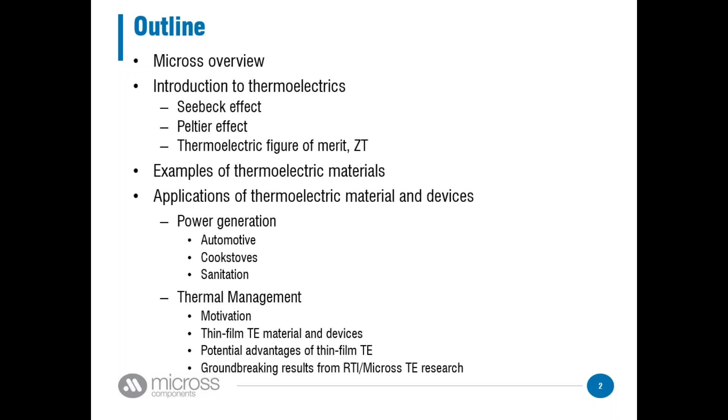First, as I said, I'll talk a little bit about Micross. Micross is a company based down in Orlando. They liked the work that we were doing at RTI, and they went ahead and bought our group out. Micross is basically a die manufacturer; it delivers any kind of die that the government needs. They work for the defense industry, space, medical, industrial. And what they want to do now is, they've never done research before, they're more of a manufacturer, but they want to get into research, and that's where RTI came in. That's what they liked about our group and the kind of thing that we did.

And they said, okay, we want to look at your through-silicon via stuff. We want to do your thermoelectric stuff. We want you to be a part of us. So that's what happened. As I said, our particular group at Micross is called Micross Advanced Interconnect Technology. That's where the AIT comes from.

We just recently got ISO 9001 certification. That was a big deal for us. We're also ITAR registered, which is also a big deal, because back at RTI we were very big into defense contracting. A lot of DARPA work. My career I've done mostly DARPA work, so that's very important for the kind of things that I do.

We do a little bit of a mix at Micross of more customer-based service work, and that is, here's a lot of wafers, we want solder bumps on a lot of them, versus the more researchy kind of thing, which is the side that I am. I do the more high-risk, high-reward, low TRL level type research. And in particular, the research I work on is thermoelectric materials and devices.

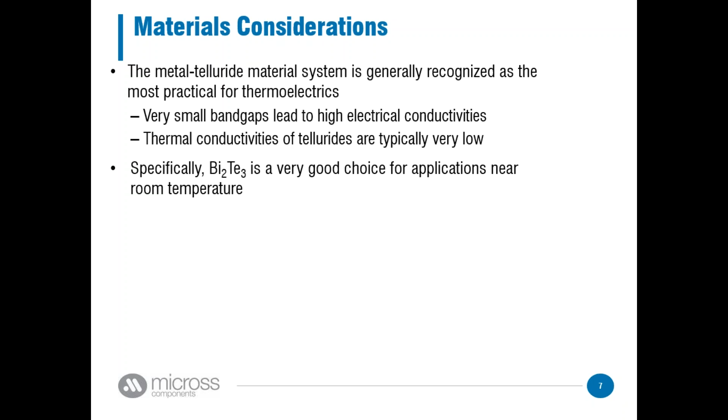So if you go and buy a thermoelectric module from Melcor, from Marlow, Custom Thermoelectric or something, it's going to be bismuth telluride, and it's going to be bulk, several millimeter thick elements of N and P type bismuth telluride. The performance you're going to get out of a commercial bismuth telluride module like that is a delta T, meaning the maximum temperature difference you will get from a single stage device, of around 70 Kelvin. And the amount of heat you're going to be able to pump is 10 watts per centimeter squared at a delta T of 0.

Don't get too concerned about this right now. I'm going to talk in a little bit more detail about what these numbers mean and why they're important, but I just want to introduce a frame of reference as we go forward into thermal management, the type of numbers that are available commercially.

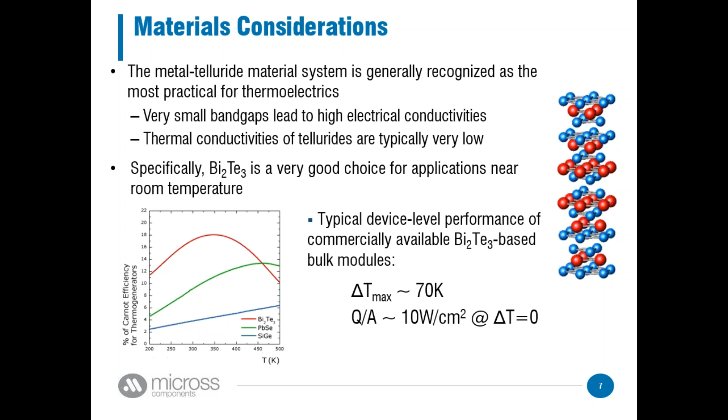Other common thermoelectric materials in addition to the tellurides are skutterudites. Skutterudites are basically a complex metal arsenide or metal antimonide structure, which has what's called a rattler atom. Essentially, it's a hollow structure that has some type of large, usually rare earth, atom inside of it. That rare earth atom is going to rattle, shake around in that lattice at a different frequency than the structure of the material itself. And that disharmony manages to scatter the thermal conductivity, which means you have the lower thermal conductivity you need to have a good thermoelectric effect.

Skutterudites are very popular with NASA. NASA uses these in their MMRTGs, the multi-mission radioisotope thermoelectric generator. Consider a radioisotope giving off a constant supply of heat. If you put this constant supply of heat with a thermoelectric material, it will convert that heat into electricity, and you have a constant source of electricity. And so it's very reliable. There's no moving parts. There's nothing that can really break per se. So NASA likes to take this type of radioisotope generator and put it in their satellites that go unmanned into space.

Clathrates are another type of material you may hear about when you read about thermoelectrics. It's essentially a cage type structure. And again, it uses the same sort of rattler atom that we talked about with the skutterudites. The two different resonant frequencies of the materials cause a drop in thermal conductivity, which again gives you the high ZT.

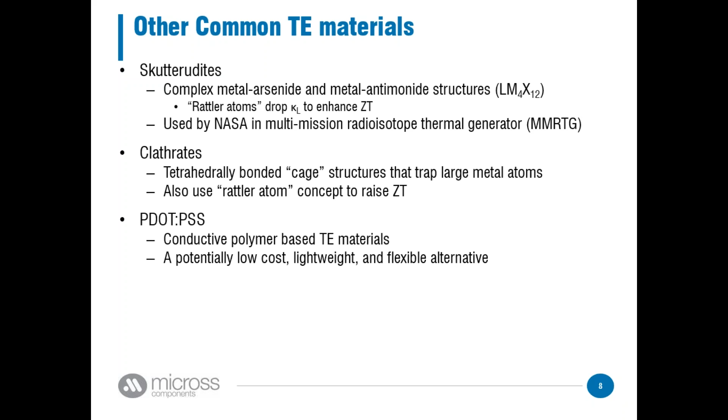And anytime you have a polymer that could do something, for example, in this case, thermoelectric effect, it's pretty exciting because they're very, very low cost, easy to manufacture, cheap, lightweight. These type of materials aren't really performing a whole lot right now, but it's an exciting potential. If we could get some sort of way to get the PEDOT to work properly, we could really push

the thermoelectric manufacturing forward. Lastly, another group that I'm particularly interested in is the silicides. Magnesium silicide, manganese silicide, magnesium tin silicide is another one. And basically what you'd have is you have a thermoelectric material. Some of these ZTs have been reported to be about 1, which, as I said, is a pretty good number. And what's nice about these is they're a low-cost, non-toxic, earth-abundant material.

One of the problems you have when you're dealing with a lead telluride, with a bismuth telluride, antimony telluride, you're dealing with materials that are expensive, which are toxic, and frankly, there's not a lot of them in the earth. For example, with bismuth telluride, we quite literally don't have enough tellurium atoms in the world to do all the things we want to with bismuth telluride.

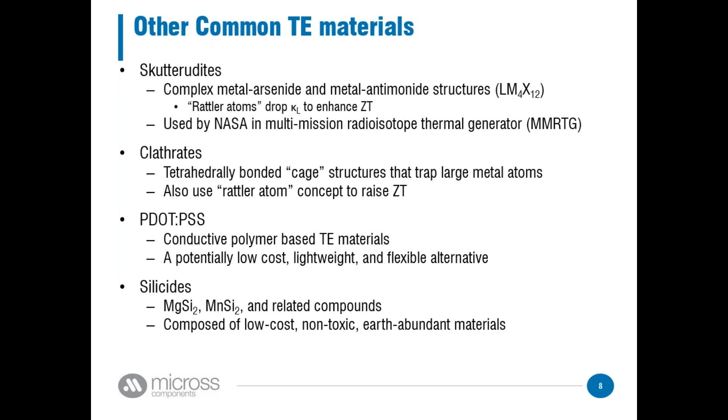For example, there's some companies that are looking at putting bismuth telluride in every car for seat warmers, for pulling heat from the exhaust and putting that back into electricity. The problem is the tellurium is just not there, and that's a problem you really can't solve no matter how good of a scientist you are. Which is why the magnesium silicide type materials are getting a lot of traction, a lot of interest right now.

So when we have this delta T generated and our charge carriers move from the hot side to the cold side from the thermoelectric effect, you essentially can create a circuit where you have charge carriers moving and you have power. The amount of power that you get is going to be dependent on the delta T. ZT is important, as I talked about, but even more important is delta T. The more temperature difference you can generate from the hot side to the cold side, the more carriers that are going to be moving from the hot side to the cold side. The more carriers you have, the more current you have, the more power that you have.

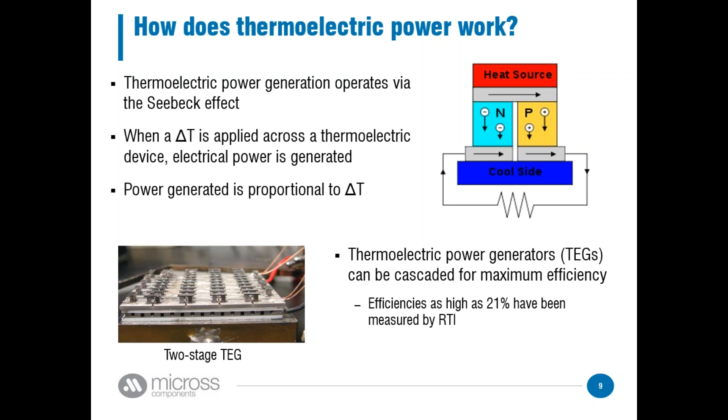Here's a sort of a real-world example of a two-stage thermoelectric generator. We have one stage here, one here. And we've measured efficiencies as high as 21%. And when you think about the amount of waste heat that's being wasted in the world today, to be able to get 21% of that back into usable electrical power is a pretty exciting opportunity.

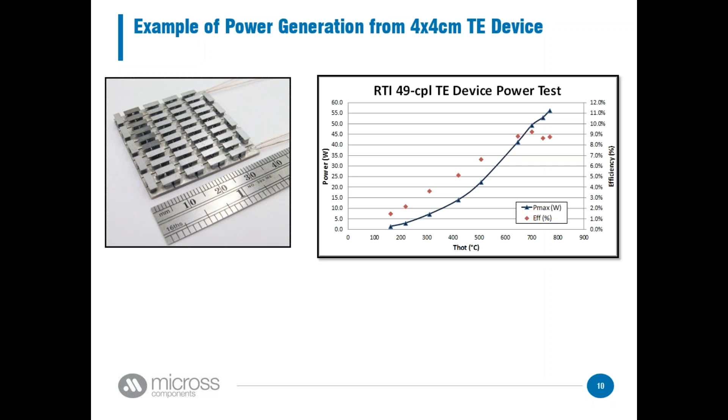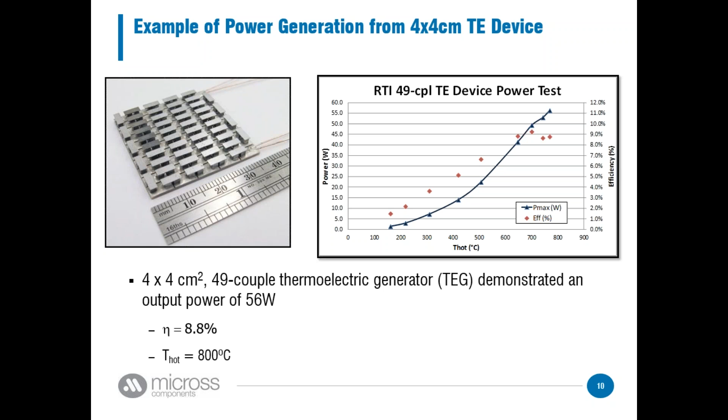Here's another example. This was some of the highest power we have gotten from a device from my time at RTI. As you can see here, here's our P and N-type couples right here, a 4x4 centimeter piece. And we've had an output power of 56 watts at an efficiency of close to 9%. You had to bring the hot side up to 800 degrees C to get this type of performance. But if we do have an area where we have sort of high-grade waste heat, 800 degrees C hot side, you could get some pretty significant wattage at some decent efficiencies out of it.

Now, we talked a little bit about the efficiency, about the high delta T, and I really want to stress this, because if there's one thing that you take from this talk about using thermoelectrics for power generation, I think this is it right here: delta T is extremely important. A lot of folks come to me and say, well, hey, I have a 100 degrees C hot side. Can you give me a thermoelectric that's going to give me a lot of power? And I'll say, well, not really.

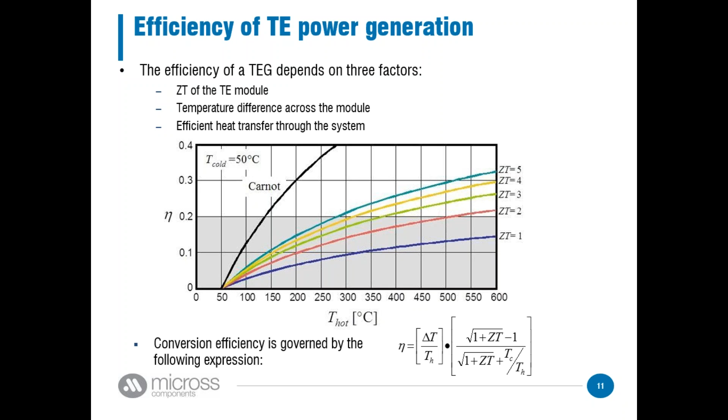And they say, well, what if you increase the ZT? And again, I say, when you're dealing with low delta T's, you could have great ZTs, but if your delta T is too low, you're really not going to get the type of performance that you need. It's not until you get out into the hundreds of degrees that we're really seeing the type of efficiencies that are exciting in this field. So remember that the most important thing for a thermoelectric device is you want to have the high delta T. That's going to give you the most bang for your buck from an efficiency point of view.

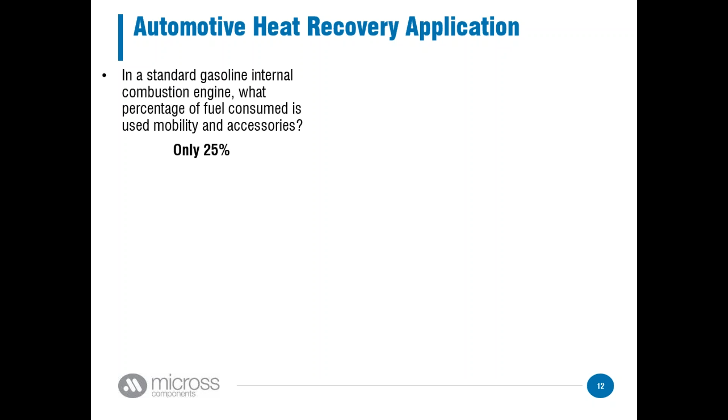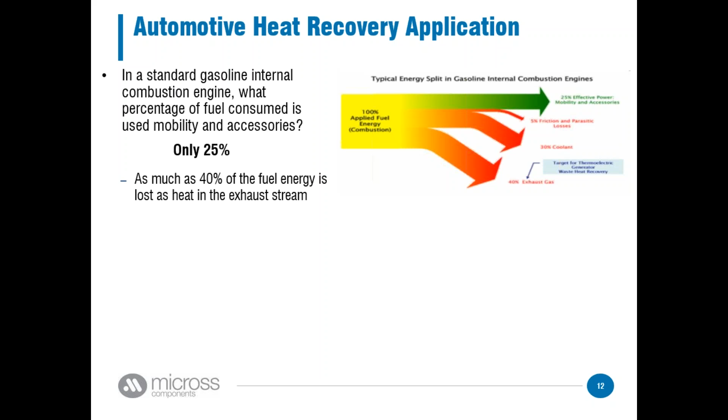One of the areas in which people are looking at thermoelectrics is for heat recovery in gasoline engines. Only about 25% of the energy that you burn with your internal combustion engine actually goes into pushing the car ahead and your devices in your car. About 40% of it, as you can see here, is just kind of wasted. Can we grab some of that 40% of your wasted heat and put that to good use? Some other areas where people have looked is in power plants.

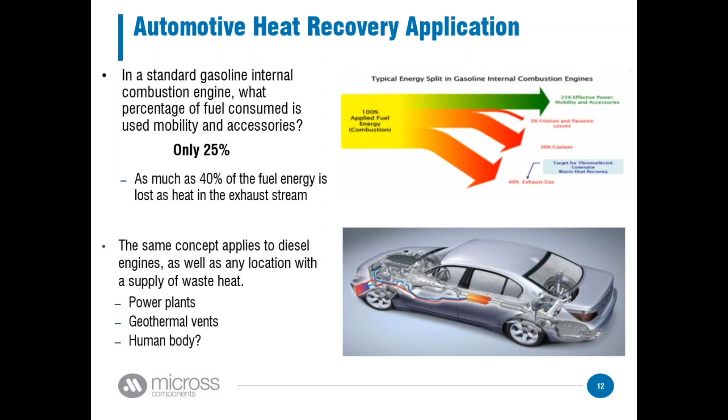And a lot of folks, specifically some folks at NC State, are looking at the human body. It's a very, very low delta T that you get from your body compared to the ambient. But that's a source of power that we all have just on us. Can we somehow use that power to power our devices, our watches, our heart monitors, that sort of thing?

Basically they find whatever they can, whether it be pieces of wood or anything that will burn. They'll feed it into their cook stove, burn it, and use it to heat their homes and cook their food. The problem with this type of cook stove, especially when used indoors inside their huts, is they're not very clean. There's a lot of particles and a lot of carbon monoxide that comes out. So there's a global health crisis of people using this type of cook stove inside and developing respiratory problems over their life.

There's a pretty simple solution to this problem, and that is to feed more air into the cook stove. The more oxygen that gets into the cook stove, the cleaner the burn, the less particulates and carbon monoxide you have, and the fewer breathing problems the indigenous people have later in their lives. The problem is, how do you actually get power to them to put a fan on this? It's as simple as putting a fan on this cook stove.

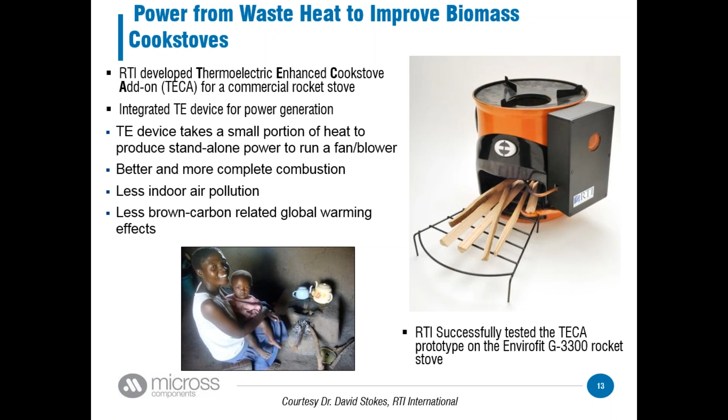Another sort of humanitarian aspect of the work we've done at RTI has been this interesting project that was funded by Bill Gates, the Gates Foundation. Another problem in the third world is basically sanitation. Basically, you have people dumping their waste into rivers, and downstream people are using that water to bathe. They're using that water to cook. So the problem of what to do with human waste in poor, very, very heavily populated areas is a big problem, and one that Bill Gates himself wanted to look into and has funded RTI as well as some other groups to look into.

So both the cook stove and the Gates toilet are two examples of places where thermoelectrics could be used to put towards literally the greater good of humanity. Very proud to have worked on these projects.

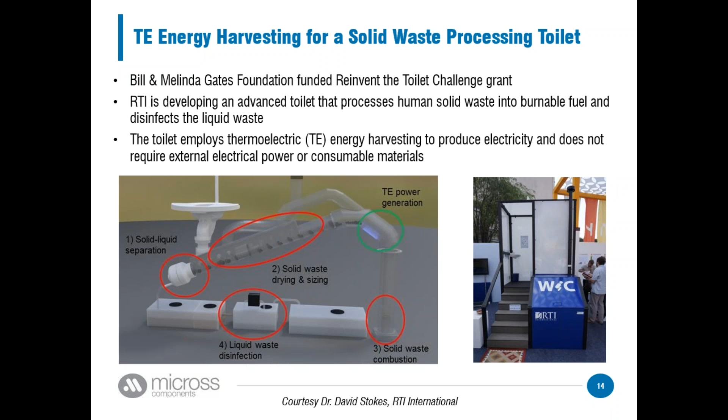I'm going to talk a little bit more about some of the things I'm working on now, which is using thermoelectrics not just for power generation, but for thermal management. Thermal management is a big problem because if you have an electronic device, you're putting current through it. If you're putting current through it, you're going to have I²R problems, and that's just a simple fact of life. You can't get away from the fact that whatever electronics you're going to use are going to have these I²R issues. And electronics don't like to be heated up. They're going to have lifetime issues. They're going to have efficiency issues.

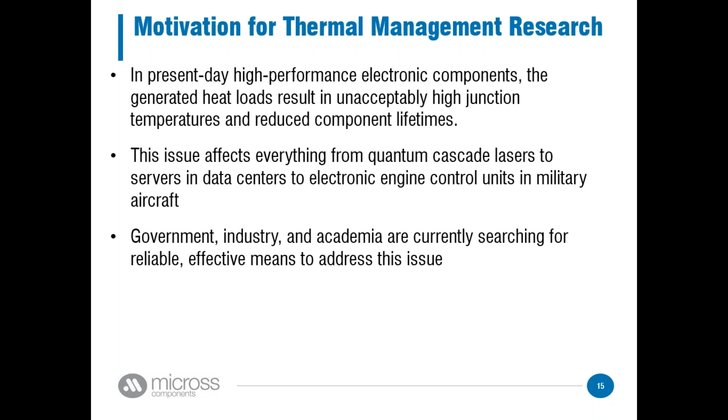Quantum cascade lasers is something I'll talk about a little later on. That's an area that I'm looking at now. Servers and data centers is a new thing. As cloud computing gets more and more popular, you pack more and more servers into more and more places running higher and higher. They're just going to get hotter and hotter. And a lot of military. For example, some military aircraft, their FADEC, full authority digital engine control, basically drones, those electronics get hot as well. So what can you do to stop this heating of electronics? Thermoelectrics is one application that could be used.

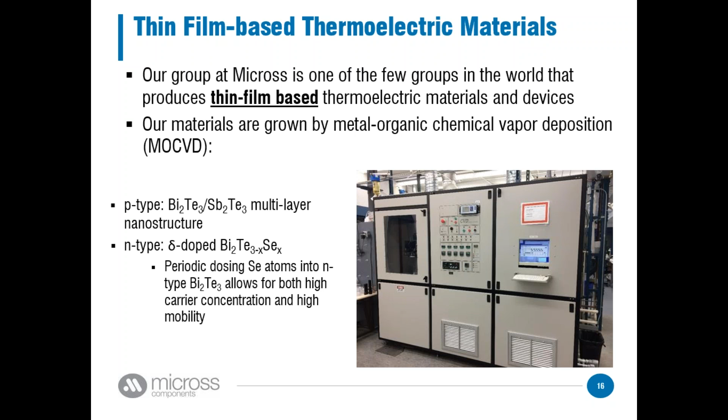Specifically, the work I did at RTI and which I'm carrying on now at Micross deals with thin film thermoelectrics. I talked to you a little bit earlier about the sort of bulk thermoelectrics that you would buy from Custom Thermoelectric or Marlow or Melcor, where you have thick millimeter size active layers of thermoelectric materials. What I have here with my materials is I actually grow something more like 5 to 7 to 10 microns of materials. My P-type is a bismuth telluride, antimony telluride superlattice, essentially a multi-layer structure. And I have a delta-doped N-type that behaves similar to a 2D electron gas, where I have high mobilities and high electrical conductivities.

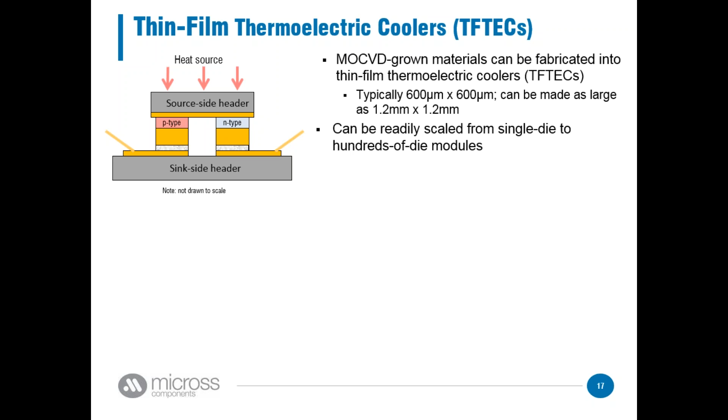So this probably looks familiar, as we talked about the thermoelectric device structure earlier. But instead of having a bulk P and N-type, as you see, I have a small, just thin active area. So we have a test vehicle. We have a die here that's 1.2 by 1.2 millimeters. These are our leads here. And this is where I pump my heat and generate my power right here.

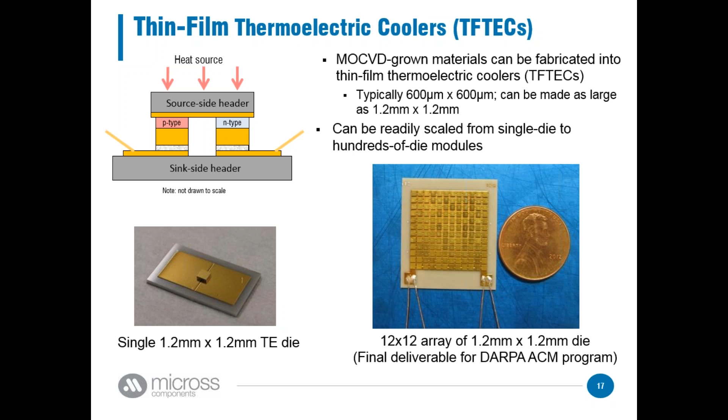And here's an array, for example, of what we can build at RTI or Micross. This is a deliverable for the DARPA ACM program. We actually delivered this 12 by 12 module that pumps 100 watts of heat. Size of a penny, pumps 100 watts of heat. Pretty amazing little guy. I talked to you about bulk thermoelectrics before. I'm talking to you here about thin films. Well, what advantage do thin films have?

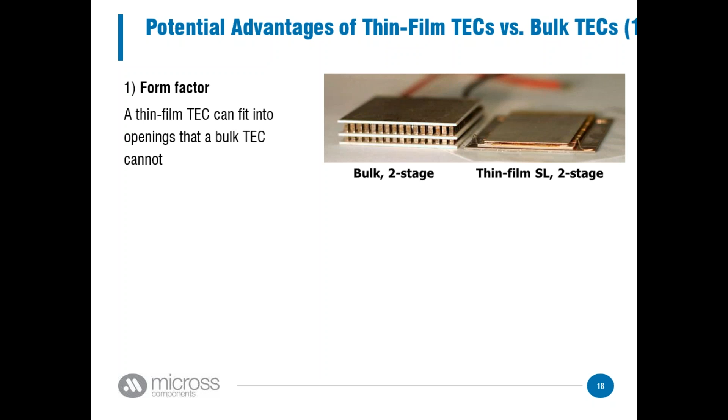What do thin film thermoelectrics do that bulk can't? Or what can they do better than bulk? The first is, of course, form factor. If you have something that's thinner, it can fit into places that thicker guys cannot. Here's an example of a two-stage thin film thermoelectric device versus a two-stage bulk thermoelectric device. I personally haven't found an application yet where I need this, but I kind of keep it in my back pocket for now because I think, simply speaking, the size is an advantage.

The second is speed. Think about the very, very high thermal resistance of thermoelectric materials, and think about trying to pump heat through a thick millimeter scale versus a thin micron scale film. Well, the heat is going to go through the thin material much more quickly, much more efficiently than it's going to go through the bulk. And you can see here, in the bulk, here are your elements. That's the size of the high thermal resistance material, whereas it's just a little guy up here in the thin film module.

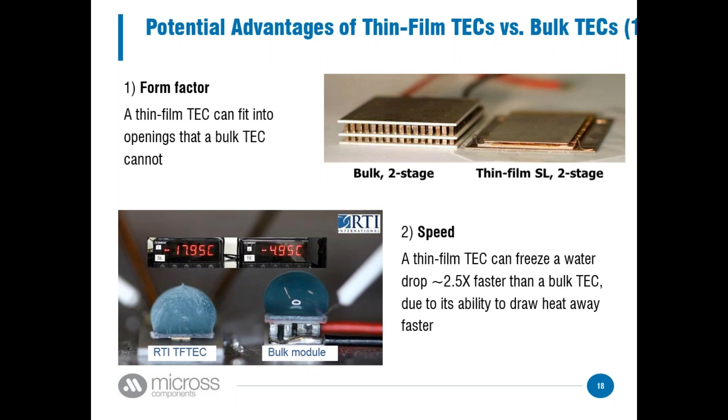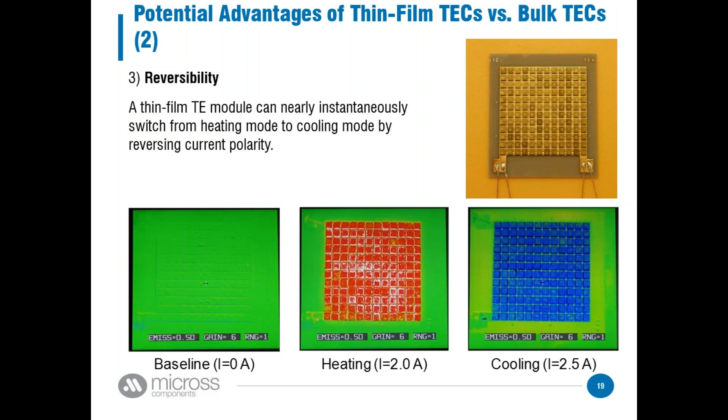Now, the fourth advantage is sort of the biggie. It's what I've based my recent publications on and what we've based some of our recent projects on, and that is heat pumping. The heat pumping equation is given right here, and heat pumping tells you how much heat you can move from one side of a material to another. This is not talking about conduction, where you have something at, say, 50 degrees and something else at 20 degrees, and the heat goes that way. A block of copper could do that. We're talking about bringing heat across at constant temperature, a delta T of 0. Or in some cases, actually pulling heat against a temperature gradient.

For example, you could have your device to be cooled at 10 degrees C and your heat sink at 30 degrees C and still pull heat from the 10 degrees C to the 30 degrees C. That's the magic of what thermoelectric materials can do. So look at this expression here. We have the Seebeck coefficient. We have our conductivities, or resistivities. We want our electrical resistivities to be low and our Seebecks to be high. The temperature of the cold side is going to have an effect. F is a packing fraction; you want them more densely packed if you're talking about Q max per area. But the last guy here is the thickness of the thermoelectric elements.

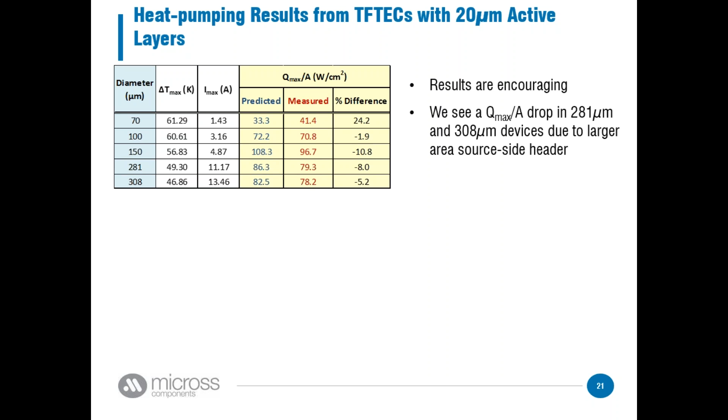We had some problems with these modules here because they had a larger area, and so even though we had a lot of heat pumping, a lot of heat coming through them, the pumping per area wasn't as good. And so you could see, we're getting numbers around 100 watts per centimeter squared. Like, wow, that's 10 times better than what the bulk guys do.

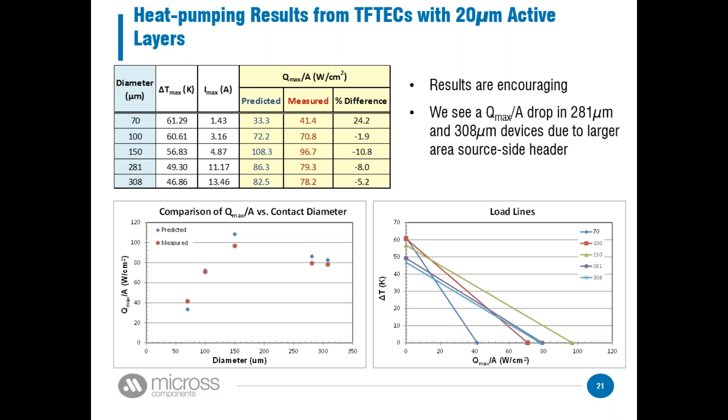But we grow 20 micron material. Can we drop down? Can we grow maybe 8 micron material? So that's what we did. We brought the thickness down to 8 microns. We fixed our die dimensions at 600 microns by 600 microns, so we wouldn't have this problem with the drop in Q over A. And we looked at different types of geometries of contacts.

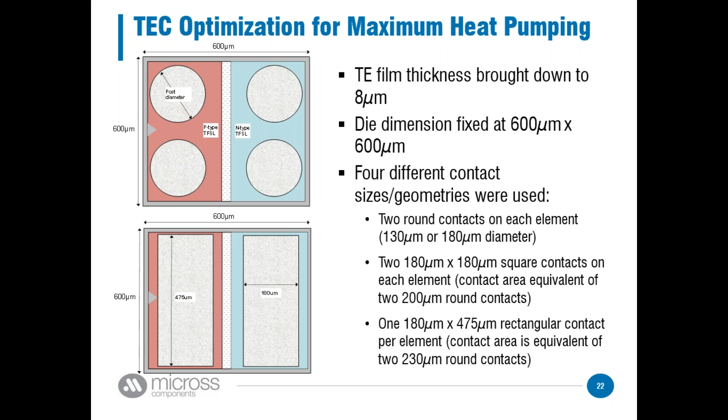We looked at basically having 2 round contacts on each N and P type. And we also looked at having these be squares instead of round. But the big thing was to maximize packing fraction. We took a look at this one and said, let's make our contacts as large as possible on the die. That's going to maximize our packing fraction. You can remember the F over L. And with it being 8 microns, that's going to minimize the thickness. Could we actually get better than this 90-100 watts per centimeter squared?

And the answer is, we did. We got a lot better. We got over 250 watts per centimeter squared. Now again, the ones people are buying off the shelves are 10. Laird, one of the companies that spun out from our RTI group, makes thin film thermoelectrics too, but even with those, they only get something like 70, 80 watts per centimeter squared. So these results were just crazy. 250 watts per centimeter squared was sort of a world record.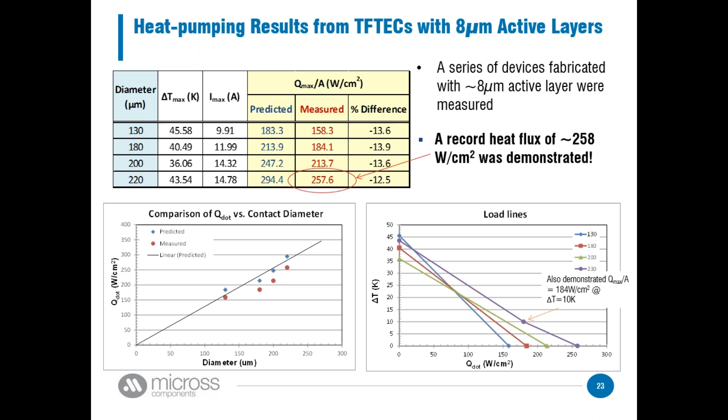We were also able to demonstrate 180 watts per centimeter squared at a delta T of 10. And again, that means the object we were cooling was actually 10 degrees cooler than the heat sink. So even though we were working against a 10-degree temperature differential, we're actually able to move 180 watts per centimeter squared. So how does that compare to other devices?

Well, you can kind of see here. This is essentially a load line. People use this a lot in thermoelectrics to describe your performance. Your bulk thermoelectric cooler is going to be right here. You're going to get around 70 delta T, and that's a nice number, but the heat pumping isn't there. The commercially available thin film, again, you're looking at something like 80 watts per centimeter squared.

But ours is this one right here. And you can see that load line is way further to the right than anything anyone else has described before. So what we can do better than anyone else in the world at RTI and now at Micross is build devices that can have high heat pumping at a low delta T. We published this in Nature Communications about 2 years ago. It's out now with more details of the work.

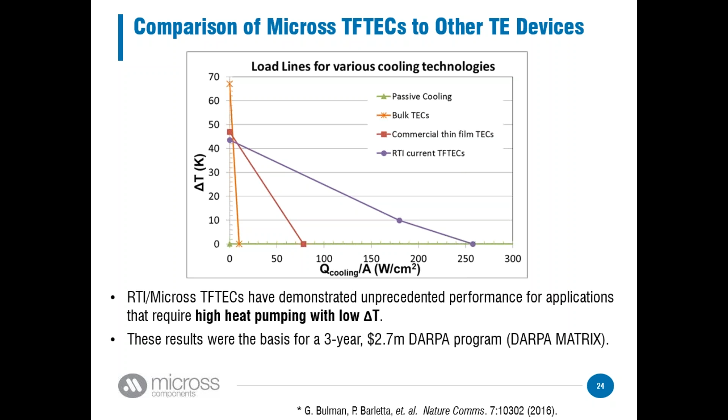And actually we pitched this to DARPA, and we were able to get a 3-year, $2.7 million DARPA award based on these results. Of course, when we told DARPA about this, the first thing they said was, how do we know you're doing it right? How do we know that your test measurements are what they need to be? And so we talked to some folks at the University of Maryland, Professor Bao Yang and Professor Avi Bar-Cohen, who was the DARPA program manager at the time, and said, okay, we saw the results that you guys got. Let's see if we get the same thing.

And what was nice about this is it's not only a different lab testing our devices, but it's also a different testing setup right here. Whereas we use what's called a Q-meter, which is essentially just a metal block with thermocouples up and down to measure the heat that goes through the device.

They use a laser at University of Maryland. And whereas we use thermocouples to measure temperatures on the hot and cold side, University of Maryland uses an IR camera. So basically what it is, I took my devices up to University of Maryland. We tested them there. And we found that their results actually were a little bit better than ours.

They took a look at the delta T max, which was the maximum amount of temperature difference between the two, where we measured 36.1. Maryland measured 37. And this wasn't our 250, this is one of our lower ones, our 214. Maryland actually measured that to be 234 during their setup. So this made me really happy.

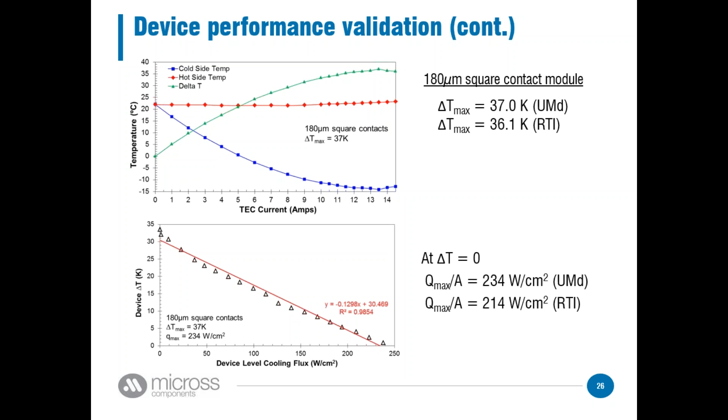This is almost like sort of an old school scientific setup. You build your devices, you measure results in your lab, you get what you get. You go somewhere else and verify. And it worked out really well for us.

So basically, like I said, we talked to DARPA. They came out with a BAA for a program called the Matrix, Materials for Transduction. And I said, okay, based on what we've done here, we have an idea. First, we think that based on the numbers we have so far, we could build a thermoelectric device that's going to pump 500 watts per centimeter squared with a delta T of 15 and COP of 1.

COP means coefficient of performance. It's essentially the amount of heat pumping you get divided by the amount of energy you have to put into the device to make it work. So that's going to be a tricky metric, but that's what we said.

And so we said that we want to actually integrate our thermoelectric devices with a QCL, with a quantum cascade laser. A quantum cascade laser is basically the perfect example of the type of electronic device that doesn't need to be cooled to a low temperature, but just needs to have its heat pulled away. They generate a lot of heat, a lot of current going through these QCLs. You've got to be able to pull that heat away. This thermoelectric device can do it.

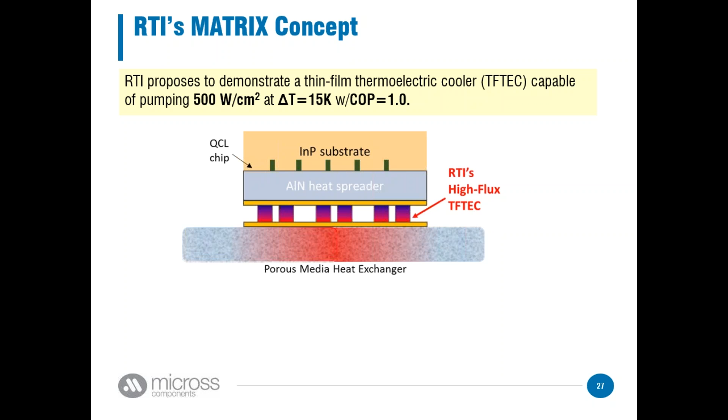We also work with a company up in Pennsylvania called Thermacore that actually develops a heat exchanger that can be useful for us. And what we want to be able to do is enable, with our thermoelectric device, a quantum cascaded laser that can output 20 watts of optical power. And why is 20 watts of optical power important? Why is this an interest of the Department of Defense?

Well, these QCL arrays can be used for what's called IRCM, infrared countermeasure, against man-portable air defense systems, these MANPADS. MANPADS are essentially shoulder-fired rockets. They're heat-seeking. So whether it be a military helicopter or even a civilian jet during takeoff and landing, these MANPADS can be used to take down these aircraft.

Basically, the problem started back when Muammar Gaddafi was in charge of Libya, because apparently he loved these shoulder-fired rockets, so he just stockpiled them in his arsenal. And then when his regime fell, they just sort of disappeared into the Middle East. So now they're being sold on the black market, and a lot of groups, including Islamic State, are trying to use these MANPADS to shoot down military helicopters. And it's really only a matter of time before they get the idea to use them against civilian aircraft.

What's nice about QCLs is, as you see here, if they have sufficient power, they can put out a pulse that basically throws the heat-seeking missile off track. It just sort of confuses it. But you can't do this with 1 or 2 watts or 5 watts. You need to have 15, 20, 30 watts to do that.

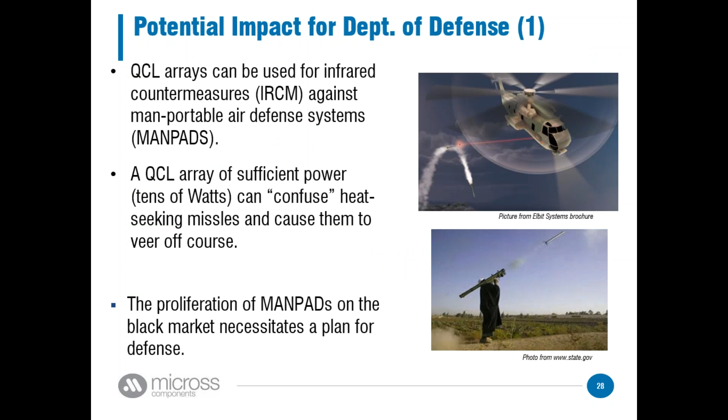We haven't worked a lot on the integration yet, but that's one of the more exciting things we're working on. Another thing that we're working on now, we recently have a patent on what I call the HITEC design, highly integrated thermoelectric cooler. Basically, what I mean by that is if you look at a thermoelectric device, we've seen what we call the Stonehenge structure a lot this afternoon.

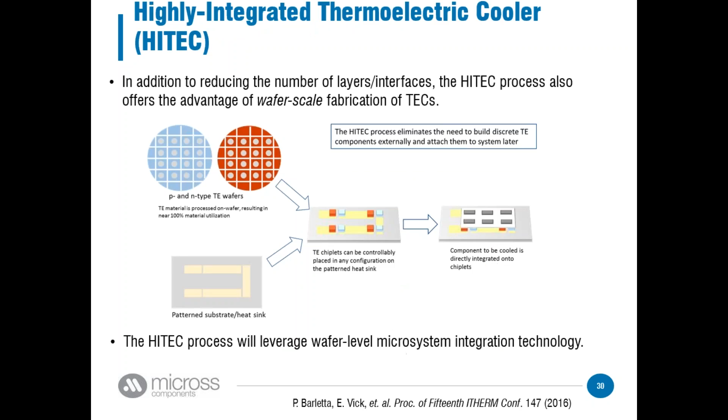But essentially, the problem we have with this is anytime you have any sort of mass, you're going to get a delta T across that mass, and you don't want delta T's across anything besides your thermoelectric.

Are people using those superlattices, those III-V superlattices? Like indium arsenide, gallium antimonide? Yes. For this type of application? It's funny, I actually did a little bit of work on that, and I wonder if you saw my paper I submitted at MRS a while back based on that. Perhaps at higher temperatures they may perform a little bit better, but generally the band gap is just a little bit too high to get good thermoelectric behavior out of them. Like I said, I don't remember the results.

I did write a paper on that for MRS a while back, and the results were okay, but we were talking about ZTs of like 0.2, 0.3. So it was interesting, but not in the 0.8, 0.9, 1 range that we need to be really useful. The band gap of that material system can be obviously really small. Yeah, with the type 2 behavior, you can bring it down. I think you could. I don't know what the thermal conductivities or what kind of Seebeck you would get out of it.

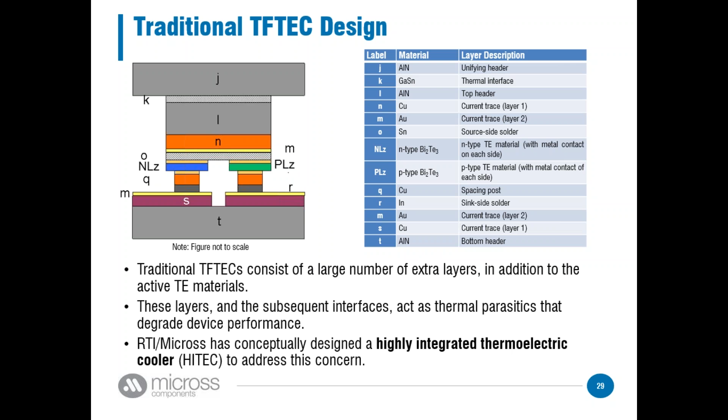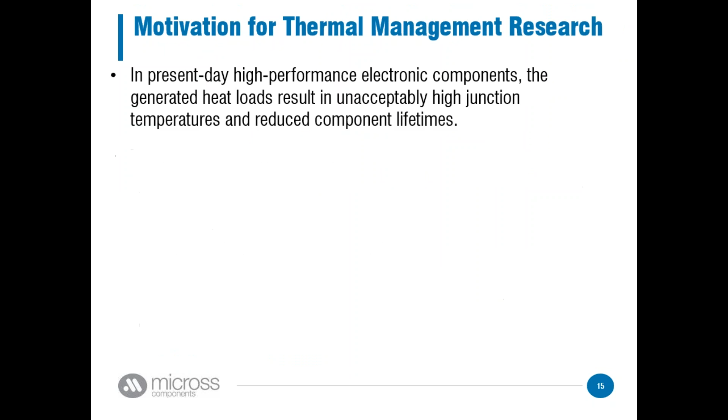Also, did you try the screen-printed contact for the TLM method? No, we've typically done plating, electroplating, and evaporation. And for this project, we actually discovered a sputter method to do that. But no, we haven't done any sort of printing. But screen-printed is much more affordable, right? I don't know. I'm not familiar with that method for electrical contacts and semiconductors in general.

But in the PV, we use the screen-printed contact all the time. You use what? Oh, screen printed. Okay. Yeah, because that's the cheapest. Okay, and what type of metals do you use? Silver. Okay. I'd like to talk to you about that afterwards as well.